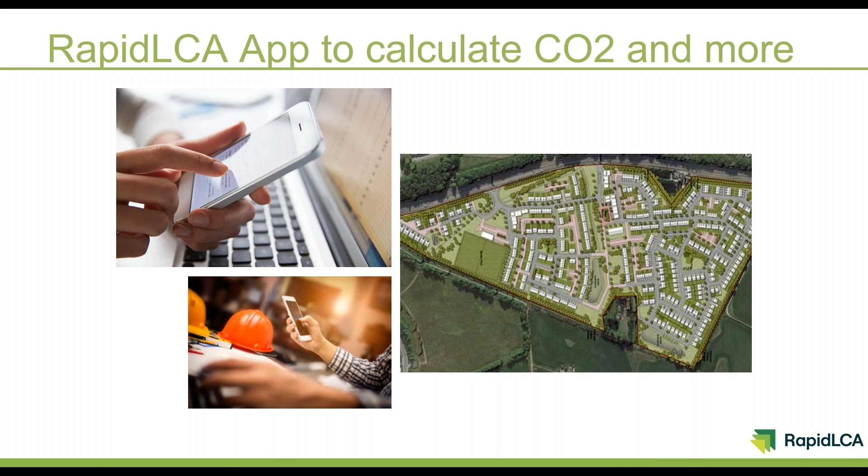So RapidLCA app is an app. However, you can also use it on your tablet or computer, and it can help you to design a more environmental house or the whole housing development. First of all, let us now have a closer look how much carbon is in one single house and how can we calculate if this house is really carbon zero.

It can get a bit overwhelming for those who aren't familiar with sustainability and have only heard of renewables or energy efficiency. This is certainly part of the whole, but what about materials used? What about water? What about longevity of your house and future repairs? Are there any methods to calculate all of it? So the answer is yes, and it's called life cycle assessment.

LCA gives us a calculation method based on the international standard EN 15978, and with this standard we know how to measure whole-of-life carbon of a construction project, and it helps us also not to miss anything on the way.

So we look at a building life, usually 80 and 100 years, and calculate all materials that go into it: construction, transport-related emissions, actual use phase, repairs, maintenance, use of energy and water during this time, as well as the cost of demolition.

And you may have heard of embodied and operational impacts. So there's a bit of a debate going on what is more important and what should be included. So World Green Building Council provides some clarity here. It says operational carbon is the module B6, and it's basically that use of energy in the house during its operation. We also think that the water should be included there as well.

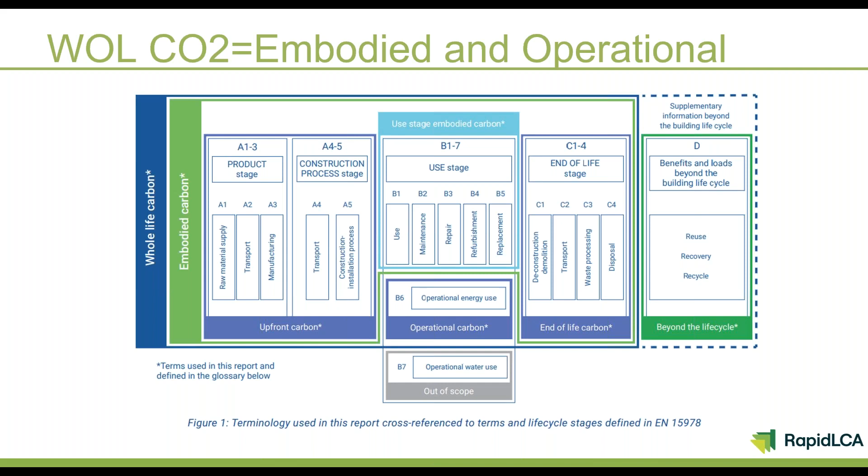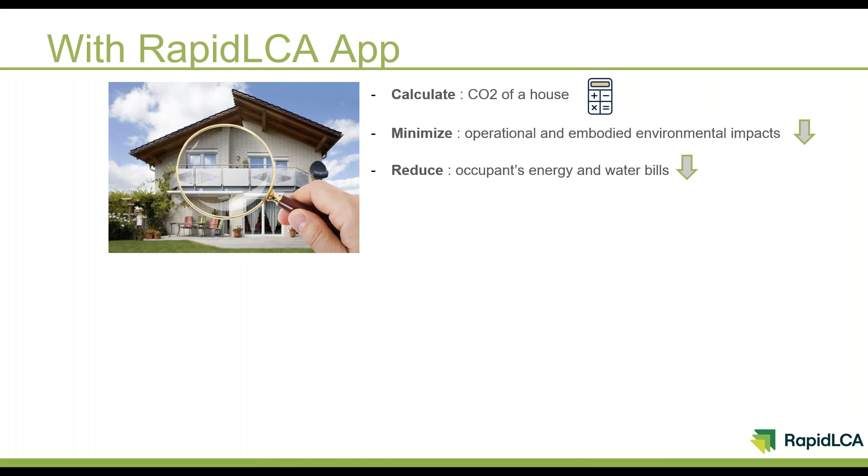Here are the main benefits of RapidLCA app. Of course, you can calculate your carbon footprint, but this is just basics. We can also go further and try to minimize both embodied and operational impacts, which will then result in lower bills. We can then balance environmental outcome with its cost and understand how to achieve a set environmental target.

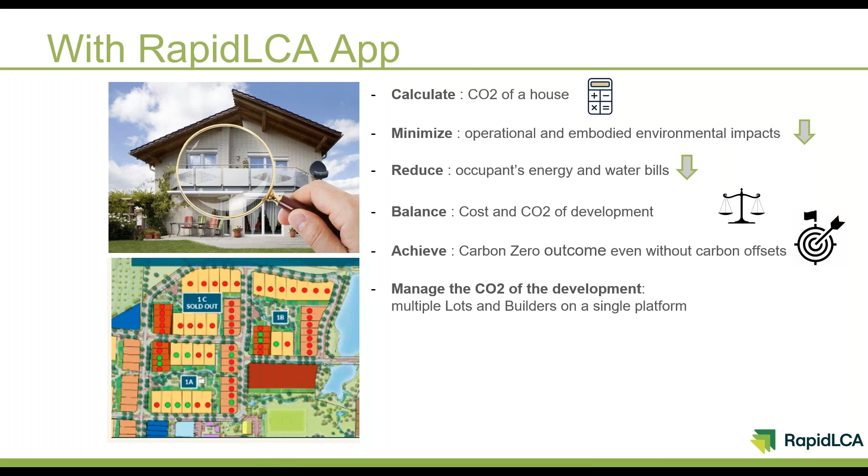So it can be, for example, 50% total carbon reduction or 100%. Actually, getting to 100% could allow you to achieve carbon neutrality even without the need to buy offset certificates. Another important feature is that if you have a large development with hundreds of lots, you can easily monitor and manage carbon of each single lot and manage this development in a single platform.

Then, since everyone can do this calculation using the app, there is some quality assurance required, and this has been implemented in the app to certify your assessment and to make sure that the results are robust and correct. We also provide customized reporting for design approvals, build permits, applications for incentives or green loans. A certified report will prove that the house is meeting a set environmental target or outcome.

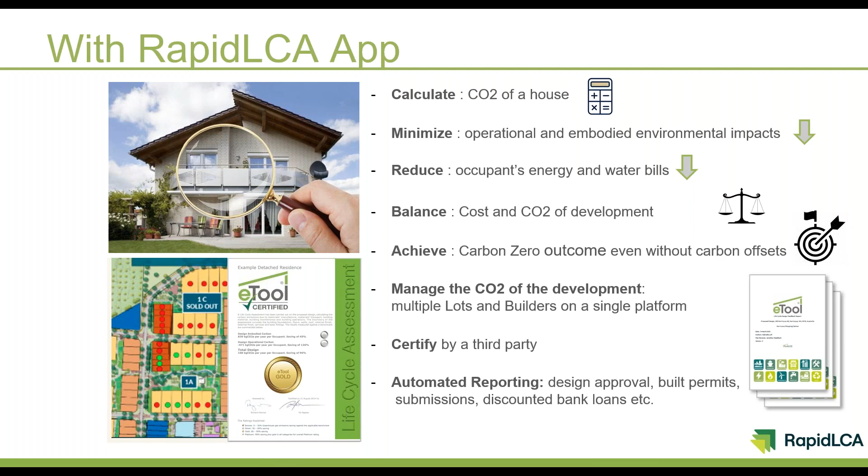And it's very easy to use. We have trialed the use of it with so many people with no knowledge about environmental design and received quite a positive feedback and great outcome.

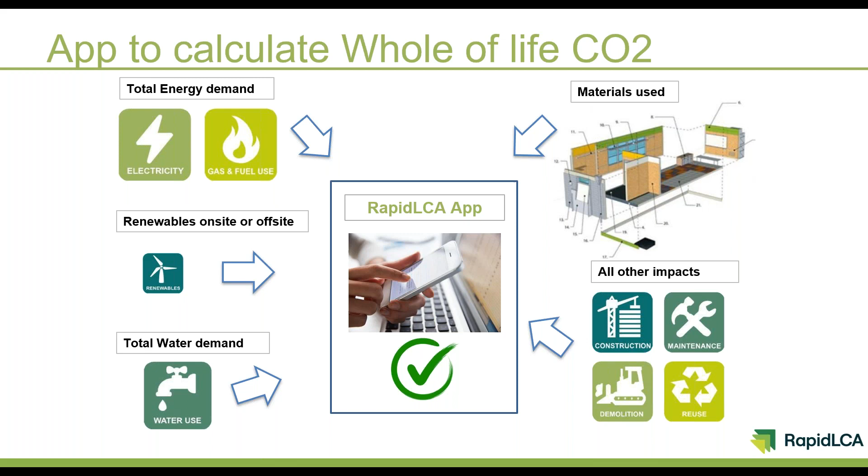Summarizing, in this app, you can measure your future energy and water use, use of renewables, use of materials, and whole-of-life carbon associated with these products. In return, you're getting not only a house with low or zero whole-of-life carbon, but also lower energy and water bills that will translate into visible results on a daily basis.

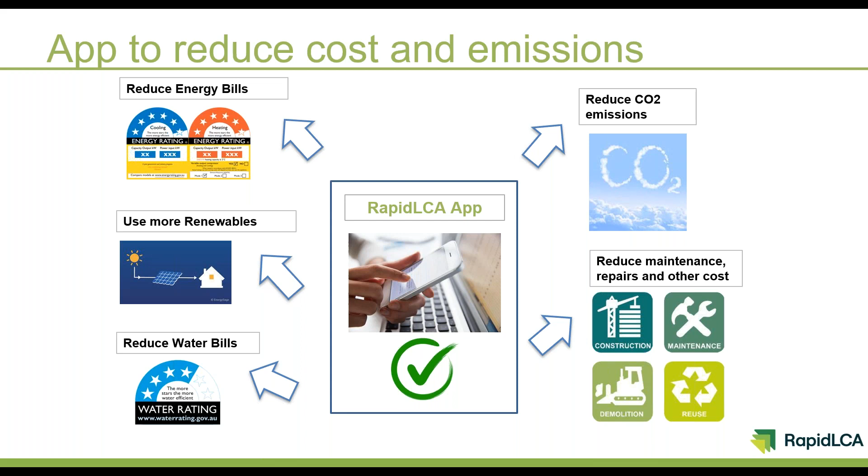RapidLCA helps to design truly zero-carbon buildings, making both their occupants and our planet happier, and can be a powerful tool to manage your entire development.

I'm sure you're now even more curious to hear from those who actually use the app and their story on why they decided to challenge the status quo of their industry. I'll pass it now to you, Jeff.

Thanks, Maria. Yeah, so I've been asked to give a bit of an overview of the Witchcliffe Eco Village, and we normally give this presentation in about an hour and a half, and I've been asked to condense it down to 5 or 10 minutes. So it'll necessarily be an overview and leaving out a lot of details, but I'll do the best I can, and then I'll get to why and how we started engaging with eTool to do life cycle analysis for the housing that we're building.

So it all started with the developers, Mike Hulme and Michelle Sheridan, his partner. They've done a number of other projects elsewhere, up in Broome and Fremantle, but they always dreamed of doing a really, really sustainable project. And they were looking for a long time to find the site that we have. They wanted to find a site that had really good rainfall, good soils. They wanted something that was attached to an existing town site, and something that wasn't too far away from employment, and also importantly something that was already cleared of vegetation. After a lot of looking, they finally found the Witchcliffe site that we're working on now.

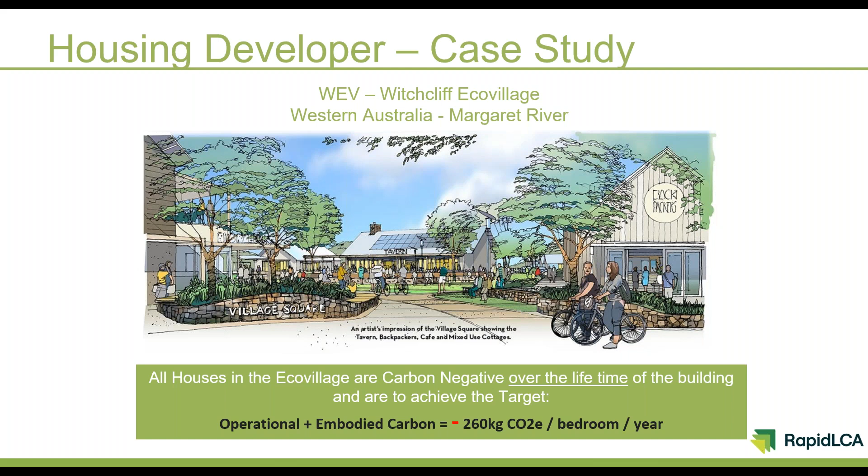So in terms of getting back to the RapidLCA, we developed a series of very detailed design guidelines for the buildings that would be built on the lots. And obviously that focused very strongly on passive solar design. So we've incorporated a lot of those principles into our requirements. But we're also aware that that really only addresses the operational energy side of the equation. And we really wanted to understand what the embodied energy impacts were.

So we engaged with an LCA consultant in Perth, Andrew Moore, to help us understand which materials we should be promoting and which we should be avoiding from an embodied energy point of view. And that led us down a path to understanding that there was actually a lot you could do with life cycle analysis, and that perhaps we should start incorporating that somehow into our design review process. So that started the conversation with eTool, and when we chatted with Rich originally about it, he let us know that this is something they've been thinking about for a long time anyway, and that perhaps by partnering with us we could actually help bring it to fruition.

So the goal of our project is to be a carbon negative housing development, and the idea there is that if we can achieve that carbon negativity in the housing, then potentially, if you include all the infrastructure, all the roads and services, overall we could be a carbon neutral project, which would be amazing. So over the last year, we've worked closely with eTool to develop the RapidLCA app, and that's now incorporated into our design review process.

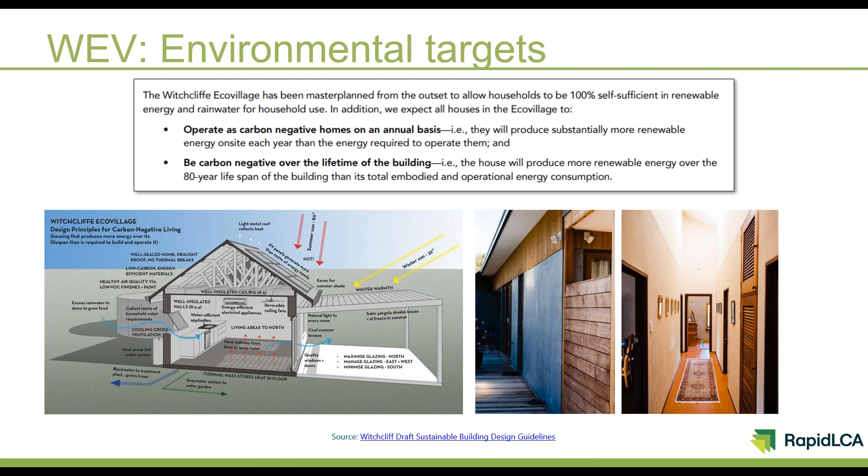So just to finish up the current status of our project. We're currently selling stages 1 and 2, which is 109 lots, and we've got about 75 that have sold, and we had about 45 settled over the Christmas period. So it's been a really great and exciting launch of the project, which was only from about mid last year. And so far we haven't done any advertising. It's all been through the website and through word of mouth.

Over the 10-year time that Mike and Michelle were getting the project approved, they started building a database of people that were interested, and now we've got over 2,000 people on our database. So we've really just been communicating with that database, and that's what's led to the sales so far. We will be going out to market more formally in the coming months, and I'm sure you'll be hearing a lot more about the project then.

The civil construction of stage 1 is nearly complete. So on the 1st of March we'll be starting to have buildings started on site, and stages 2 and 3 will be completed sometime in April or May. And we're just starting design work on stages 4 and 5, which are the final stages of the project, and we're hoping to have civil construction start probably late this year.

The village centre itself is currently under construction, and we're starting the design process for the community hall, which will be the first building built in the village centre, and that'll probably be ready sometime late next year. So that's the current status, and happy to hand it back over to you, Maria.

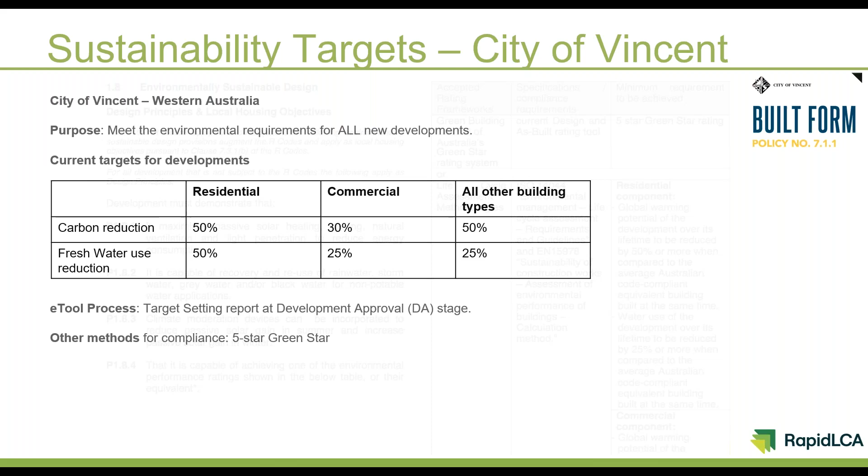So all building types just tries to capture everything that is not a residential or a commercial. Where the development is a mixed-use development, we ask them to do a separate residential and a commercial assessment for those two parts. So the reason that we've chosen to use a life cycle assessment as a methodology for our applicants to show their environmental performance is that we really wanted to be able to quantify what we were achieving

with our requirements. Initially, we considered just creating a checklist that applicants could tick off certain technologies and design features on, but we rapidly realized that first of all, not all technologies and design features are going to be suitable for every context. And secondly, that we simply couldn't know how much of an impact we would be having through that kind of checklist approach. And therefore, we arrived at the life cycle assessment methodology because it quantifies very clearly the amount of carbon and water saved over the lifetime of each development.

So the screen that we're on at the moment is actually showing an excerpt from our built form policy. On the left-hand side, it shows what we call our design principles and local housing objectives. The first three of those actually talk to the more qualitative parts of environmentally sustainable design and to some extent to the comfort of living in these types of developments. Those qualitative measures are also then reflected within the life cycle assessment, in that maximising passive solar heating, etc., is going to be reflected in the carbon performance as well. But we do want applicants to just take the time to really describe how they've achieved those. So that's what those first three objectives on the left-hand side of screen are about.

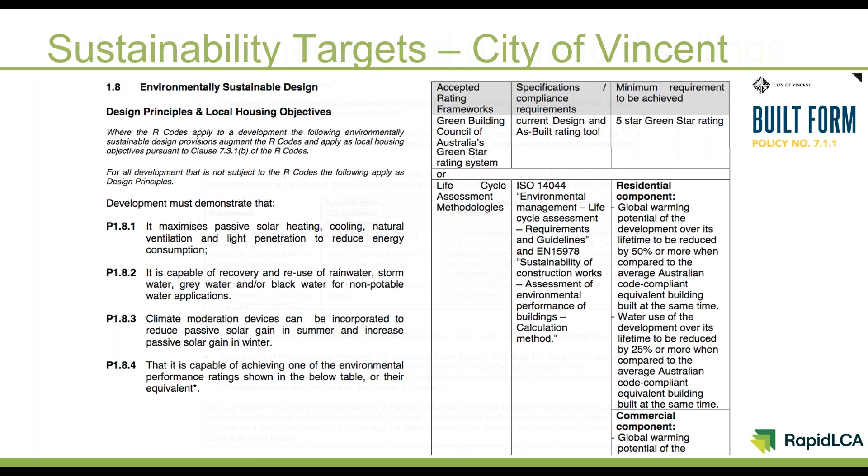And that's where RapidLCA really comes into its own. We've been really pleased to be able to work with eTool to help them develop and refine this tool because it creates a much easier pathway for applicants to be essentially able to do a DIY version of an LCA assessment where they can sit down and the app guides them through the process of doing their own assessment. That will still give us an outcome that we can interpret with quantified performance outcomes just as easily as we could a desktop study done through employing and engaging an assessor to do that for them.

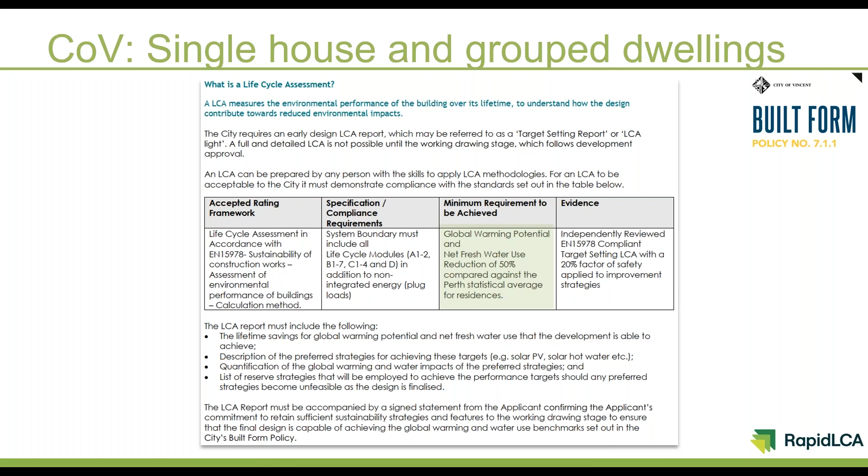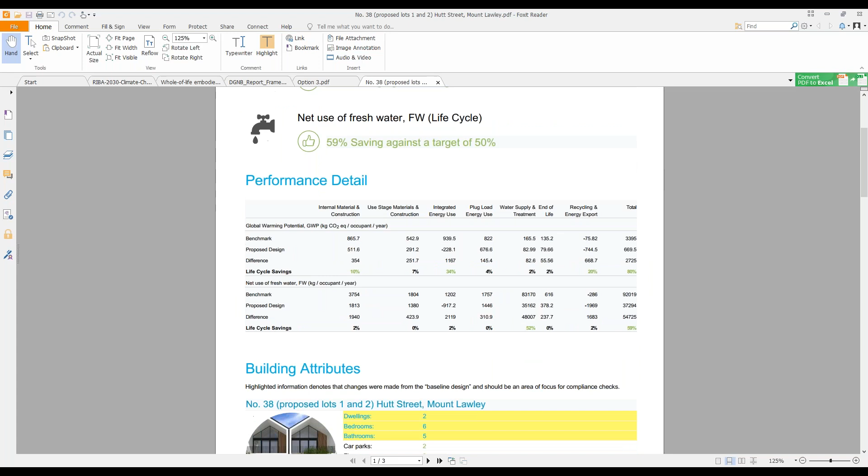And then on the right of the screen goes on to the rest of the report, which then really provides that robustness in terms of the planners being able to drill down into where those greenhouse gas and water savings are coming from in that development. And I think Maria, thank you, Maria. She's just switching to the actual PDF version of that report to give us a little bit more detail. So that table above that we've just scrolled past basically shows which areas of the building and whether it's embodied versus use and so forth, where those savings are coming from in each of the areas of energy and water.

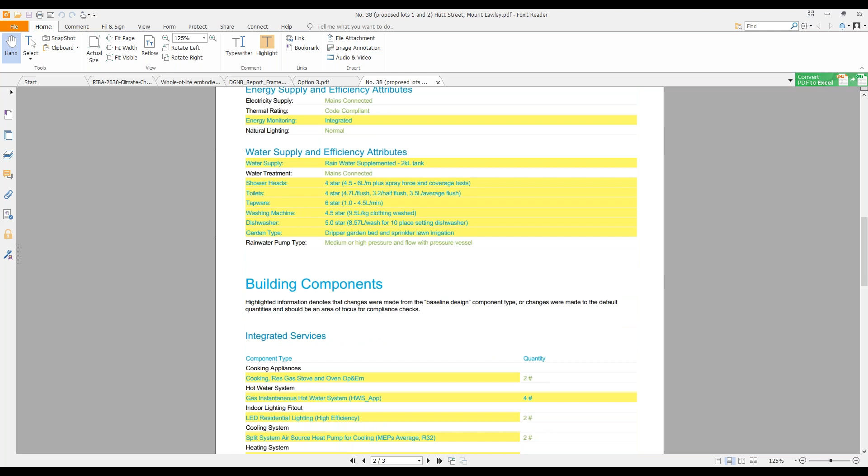And then further down, what we're looking at is each of the highlighted rows, the yellow rows, show where the applicant within the app has changed from the default template. So we've set our default template to essentially be the status quo, business as usual development that would normally be produced in accordance with the Building Code of Australia without the addition of environmental design features. So that's what they start with, as their blank template. And then every change that they make to that template is shown as a yellow highlight, and hopefully every change they make improves the environmental performance.

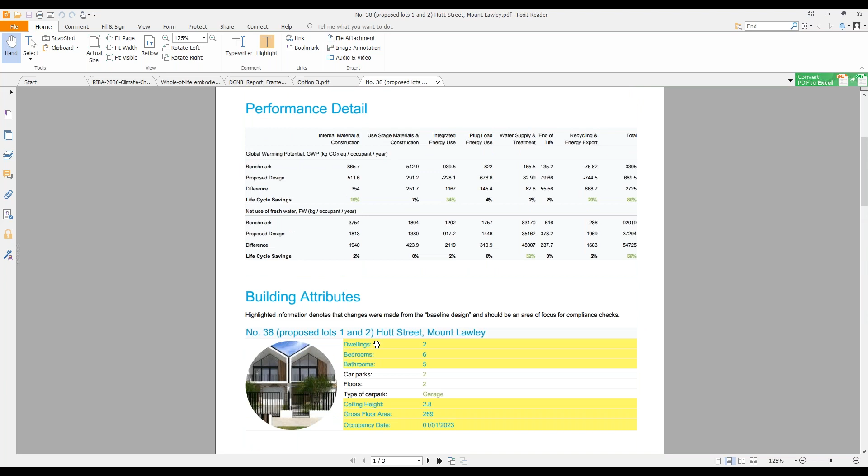So that allows our planners to see very quickly where the changes have been made, and to, I guess, pick out and focus on anywhere where that change may seem a little bit out of the ordinary or perhaps a little bit unreasonable. They can drill down and maybe ask some questions and investigate, just in case somebody's really tried to put something unrealistic in, or they've made a mistake. But that is the overview of the report that comes out to us. It makes life easier for our planners, and it makes life easier and more affordable for the applicants. So we're hoping that in this way, we're going to get really great outcomes for everyone involved. And I think that is all from me.

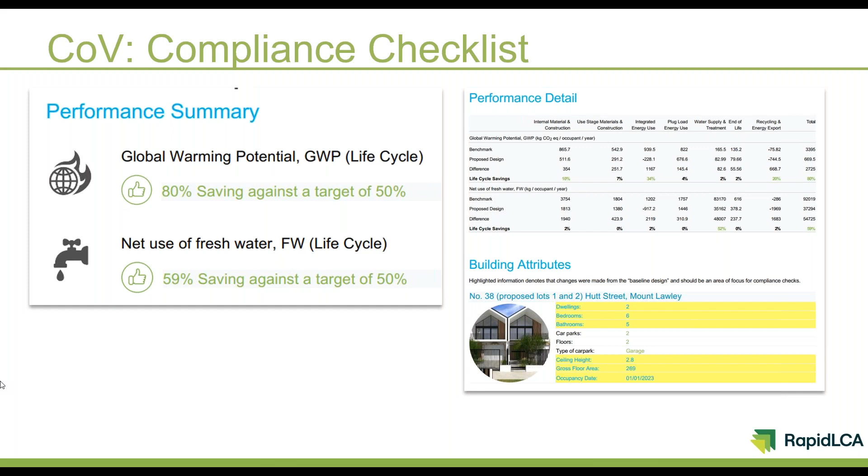Thank you, Miriam. Thank you so much, Anita. I'm sure now you'll get some more phone calls, not only from homeowners, but also from other councils across Australia. Oh, we hope so.

Yeah, hopefully we can now have a few minutes to see how the app actually works. Would you like to share your screen to provide a demonstration?

Yep. Let me get on top of the tech here, Maria. Thanks. So, just got to make sure. Here we go. Can you guys see that? Yep, we can. Awesome. Okay, so I'll just refresh this.

So what we're looking at now is the application as you'd see it on a mobile device. You can use it on a normal browser, and at the moment, I think most people are probably still using it on the browser. I'll just show you what it looks like there. So it's pretty much the same, but just on a bigger screen. I'll go back to the mobile view. And the reason, I guess from day one, we really wanted this to be easy and accessible. We're pitching it essentially in terms of the usability at sales staff and also homeowners themselves. And that's actually being demonstrated through the early adopters, Witchcliffe and the City of Vincent DA applicants.

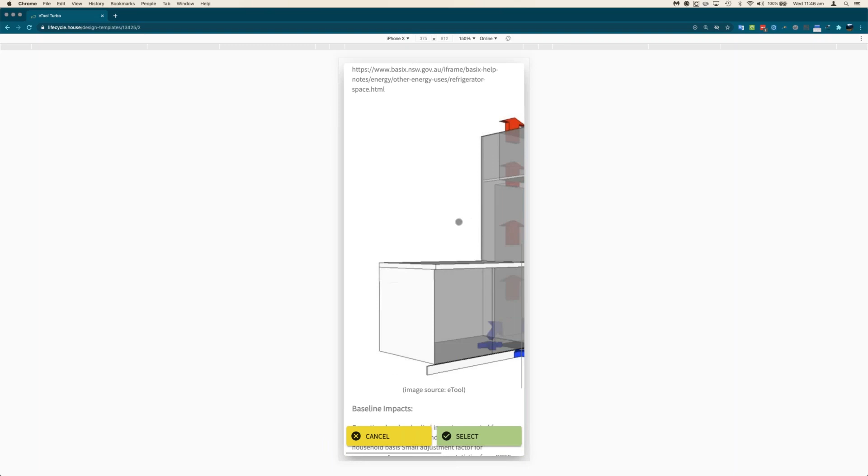Actually, I think there's a picture in one of these other ones. Yeah, here it is here. So not easy to see on the mobile screen. That's a bit of a glitch there. I need to send that back to the devs. But we'll choose this other one, which is the smaller opening as well. But in most cases, when you're clicking through on these options, it'll give you some guidance on what you're selecting. There's going to be more transparency on things.

We'll put a small PV system on this building. We won't change any of these other ones. We'll leave the swimming pool at 0 meters squared. Assume there's no pool in here. We can customize the structure as well if we like. Again, I'm going to leave this initially, but we'll come back to this when we go and really optimize our building. What I might do is just change this elevated floor to a thicker slab for the elevated floor. So it's pretty easy to make changes to the design and really customize things.

We might customize the floor finishes as well. So perhaps we could do something like polished concrete for the living areas, and we'll do that for kitchen dining as well. If we want to customize actual quantities of these different things, we can, but that's really up to the user how detailed they want to go with the assessment.